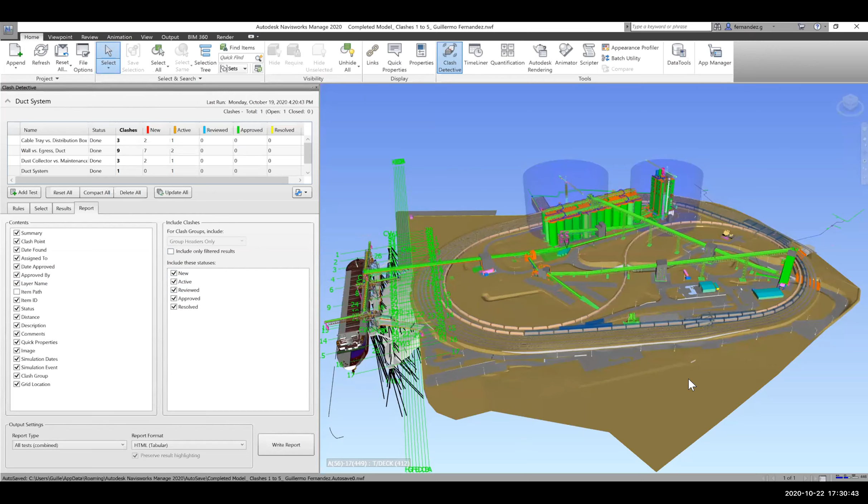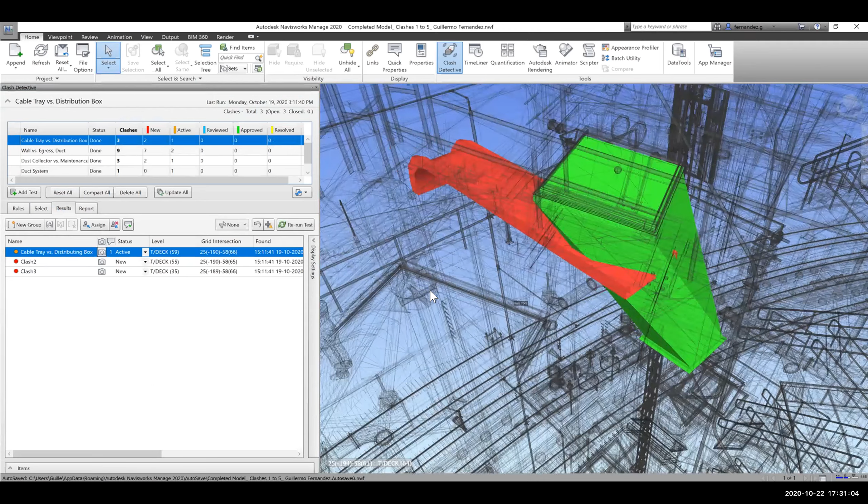So for this project, we decided to only focus on the scale tower right here. I'm going to talk about the first 5 clashes, and my partner Vladimir will talk about the next 5. For the first one, we saw that this cable tray is intersecting the distribution box, and we decided the best solution is to move the cable tray to pass right next to it so it doesn't interfere, because moving the distribution box would be much more difficult and we'd have to move the whole system.

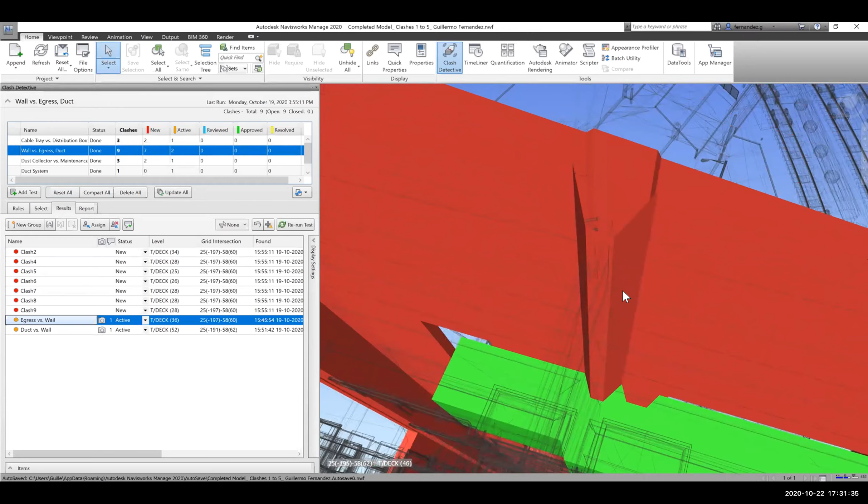The second clash we found was that this egress system, as you can see, this wall has a trapezoid shape, and the egress system has a cutout, but it does not align with the trapezoid. So we suggest making the cutout a little farther so it fits right through the trapezoid, because changing the structural elements would be super hard and costly.

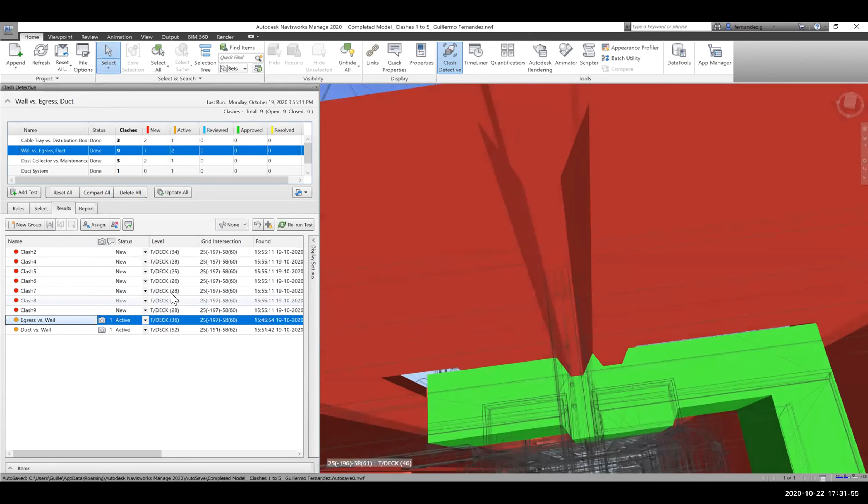The third one we found is here, where the duct system passes partly through the hole, but not completely. Some part of it passes into the actual wall, not the hole. So the best solution is to move the hole a little to the left to make sure the whole duct system falls through the hole.

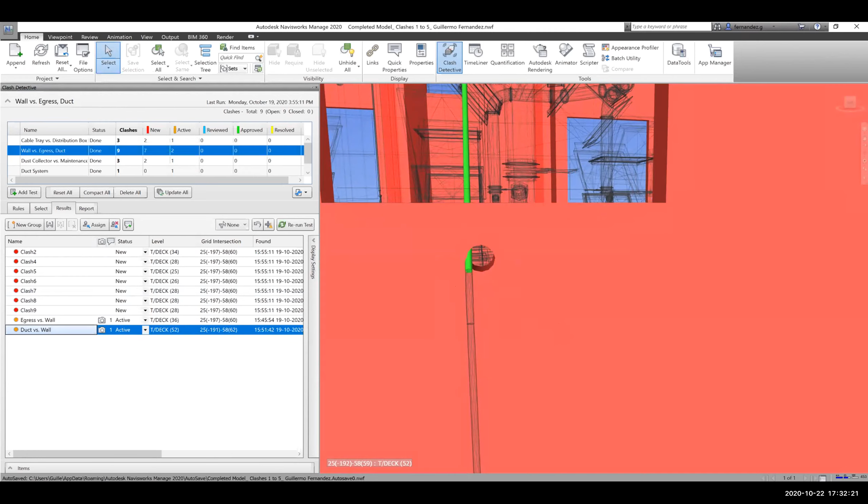Just a quick question here. Why wouldn't you move the duct instead of the hole? Because then you'd have to move the whole duct system, and that would be costly for the engineers and the owner of the project. Okay.

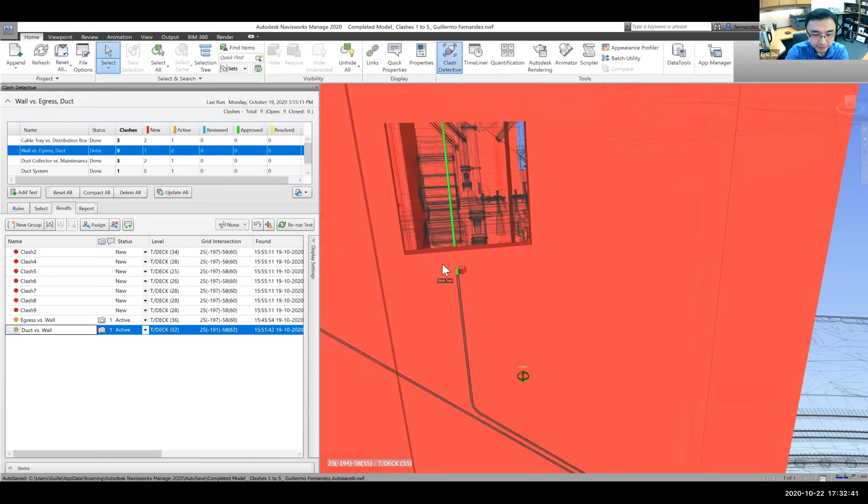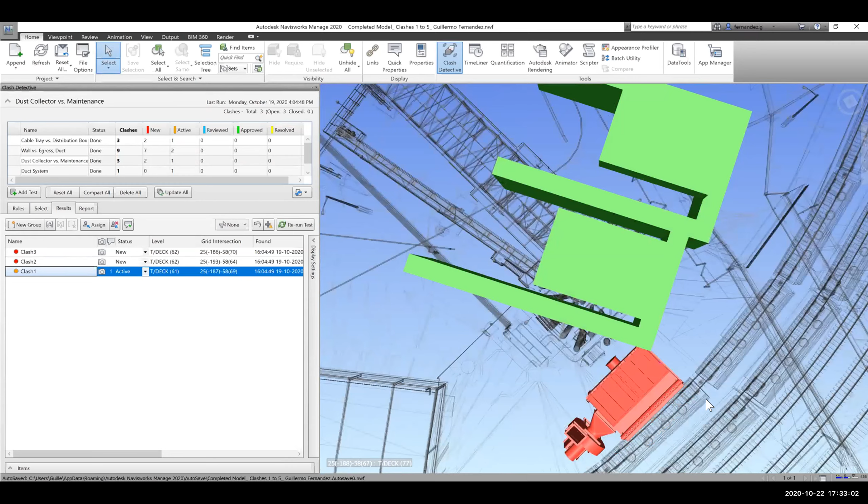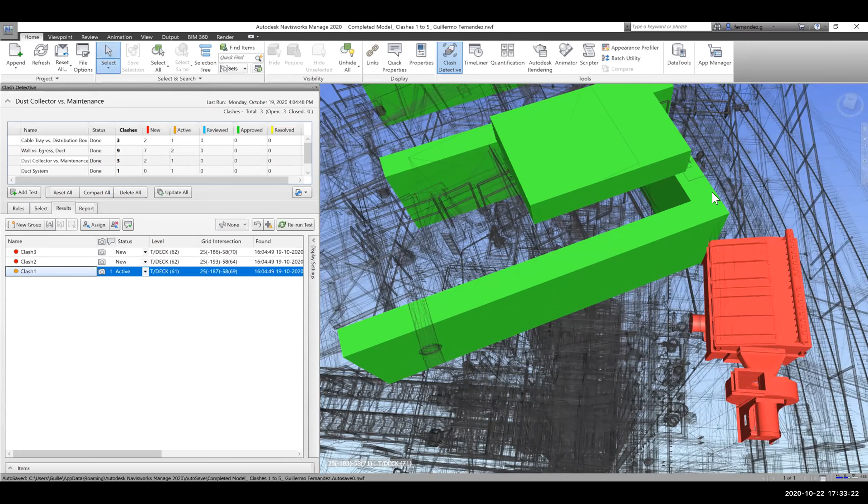For the fourth clash, we found this one. It was the dust collector, seen in green, slightly intersecting with the maintenance system in red. This one will be hard to fix because both systems depend on other things. But we think that if we make this piece turn closer to this side rather than that side, it will be better, and we can fix it like that.

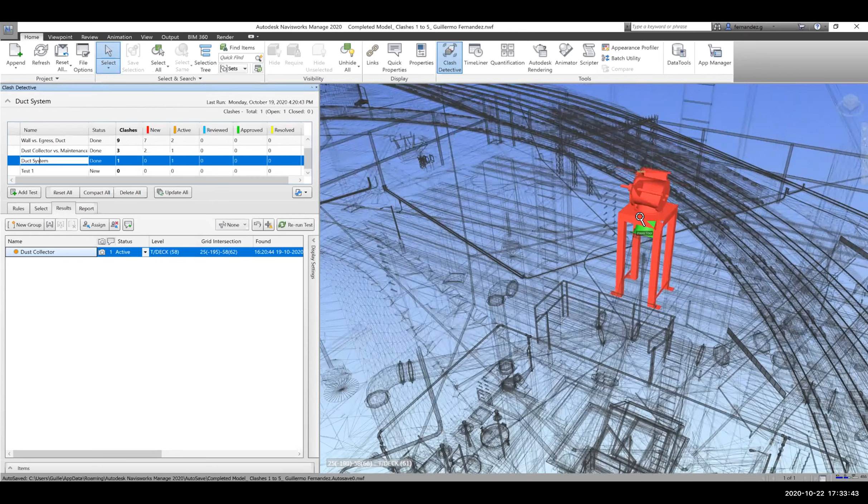The fifth one was the most intriguing one. As you can see here, the dust collector system, the red one — let me see if I can get the view, I'll just show the picture.

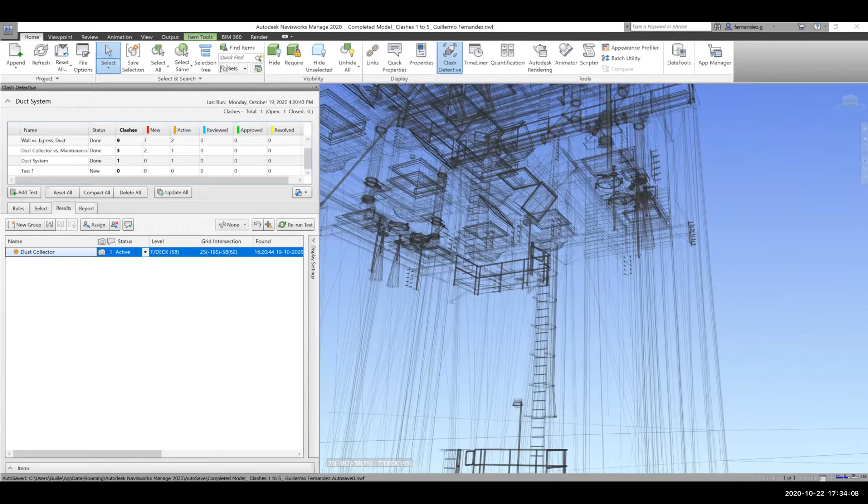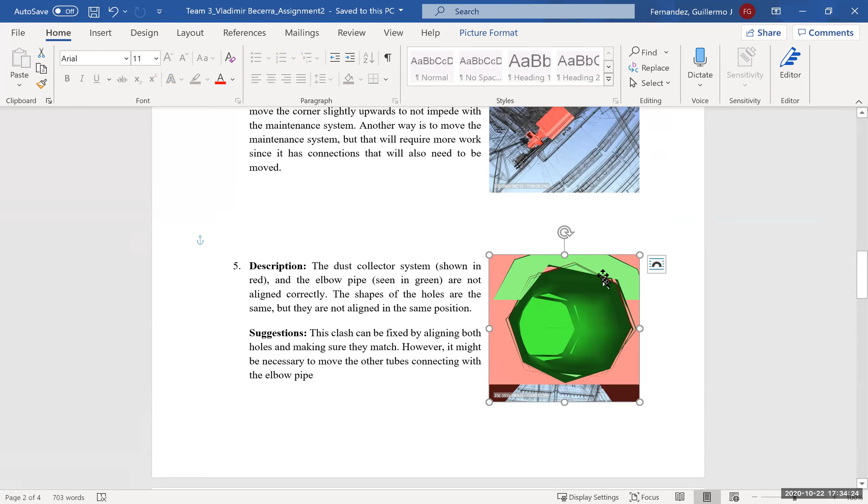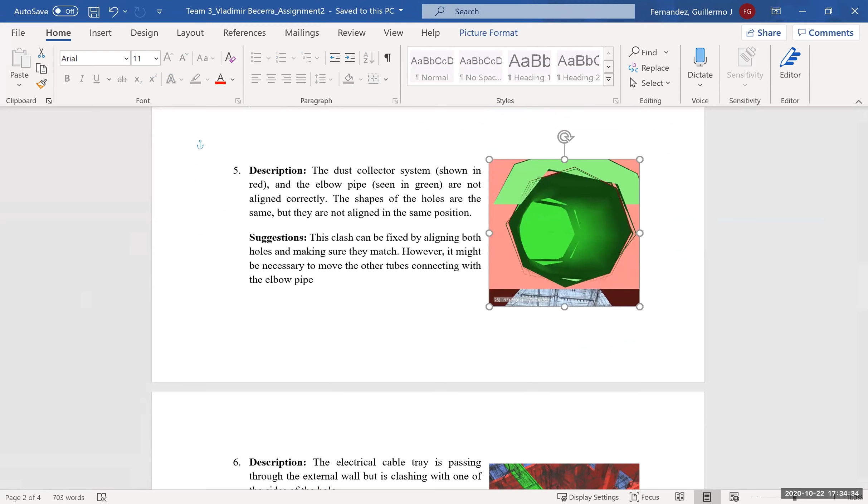Do you guys see the picture? Yes. So you can see here both the duct system and the piping going through it are not aligned correctly, the shapes aren't aligned perfectly. So we will have to move the green one slightly and rotate it a little so it fits perfectly. But the problem is that it will then intersect with the rest of the system, so we'll have to move both things and make sure they align perfectly.

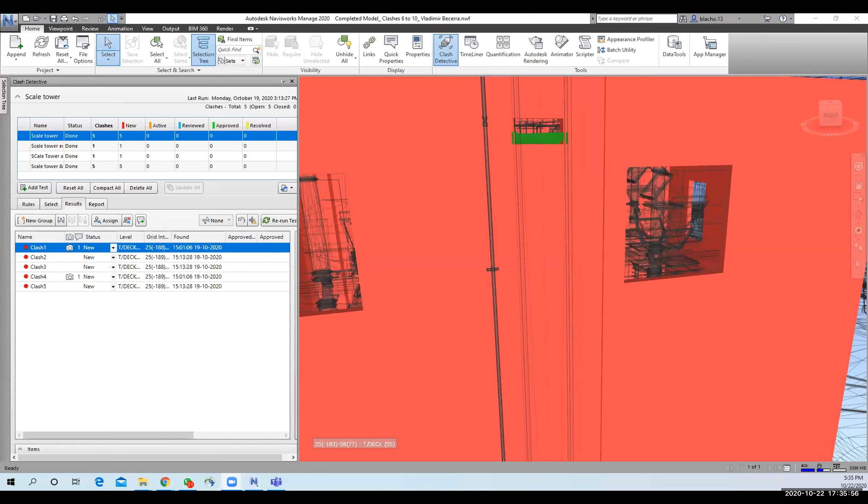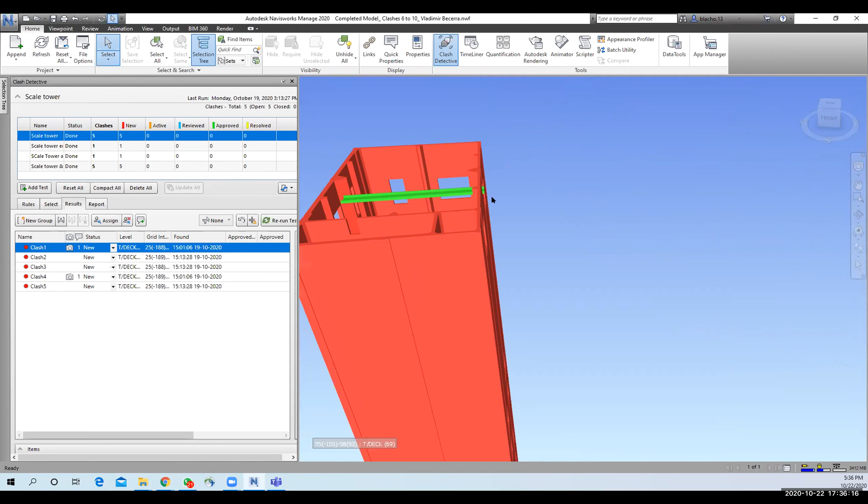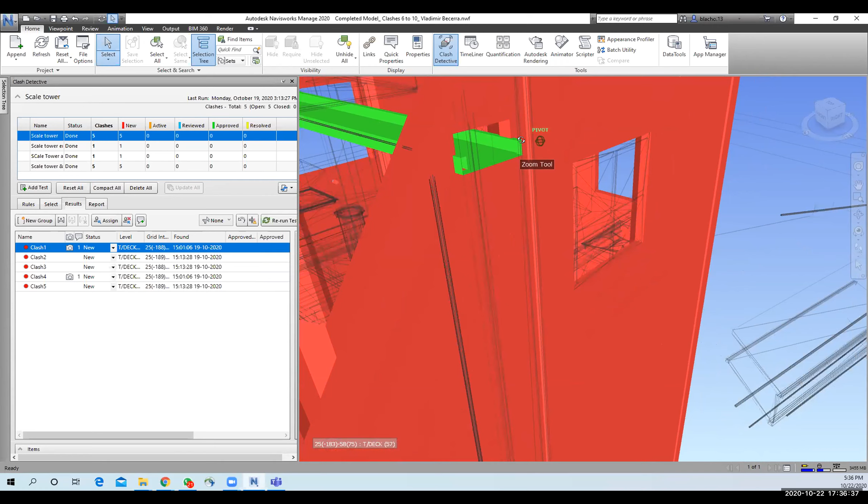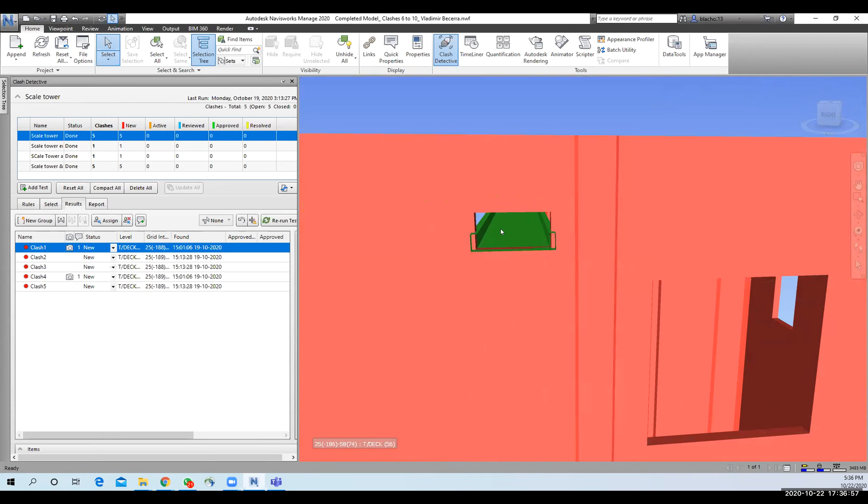So the sixth clash we found on the building, on the scale tower, is actually a clash with the electrical tray. As you can see, the electrical tray is passing through the external wall of the building. Let me see if I can show you better. So in these corners, the electrical tray is passing through the external wall. A solution that might be beneficial for this clash is changing the size of the electrical tray so it fits perfectly in the hole in the wall, or increasing the size of the hole in the wall — those are two solutions to solve this clash.

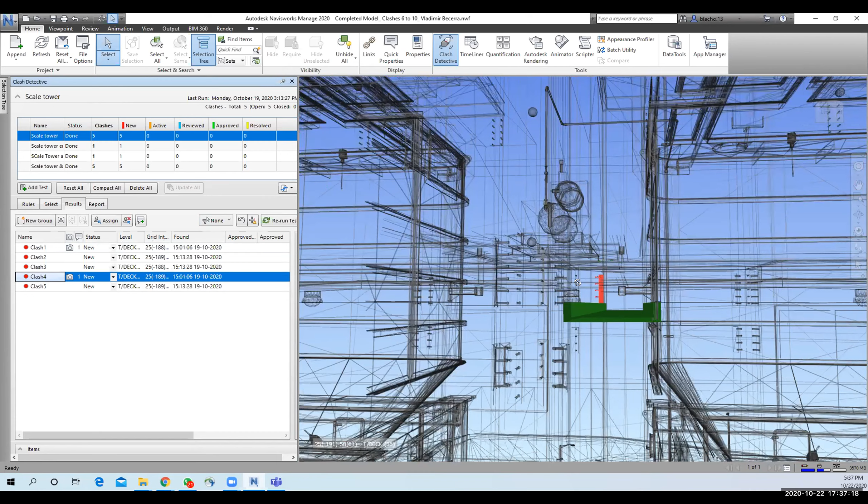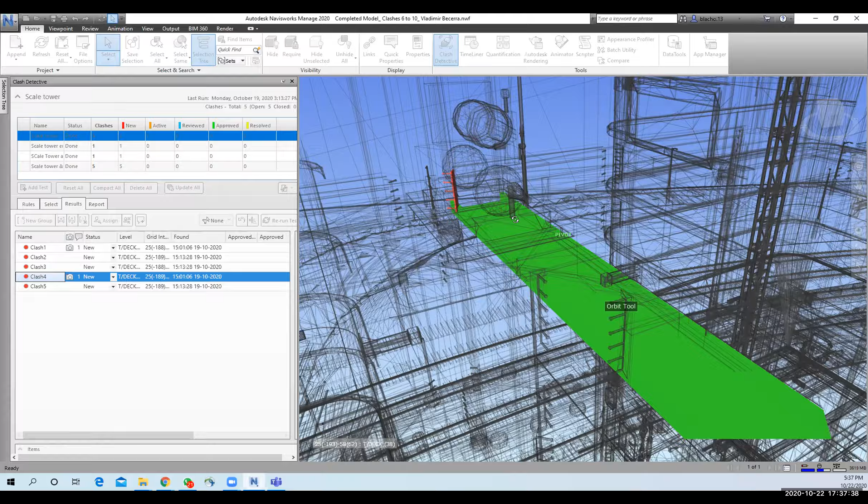The other clash that we find is — not the same problem, but the same structure — also involving the electrical tray. As you...

Maybe having some difficulties with the program. It kicked me out of the model. I'm just opening it again. I'm so sorry. It's fine, it happens all the time.

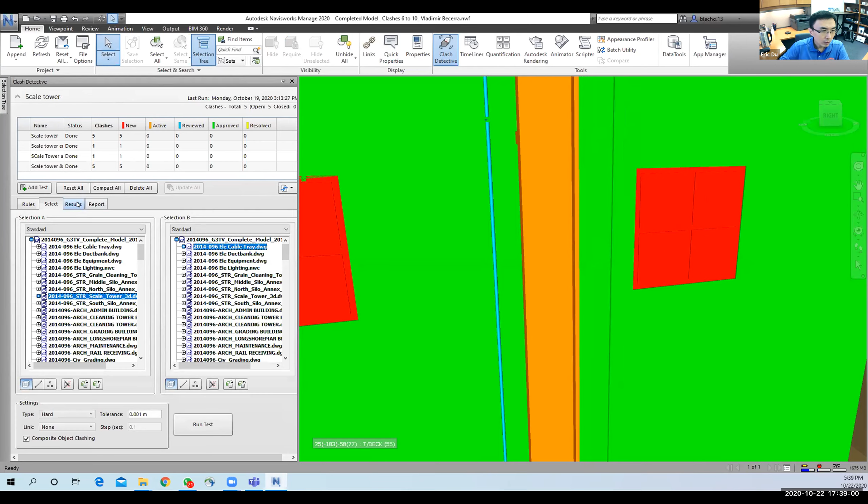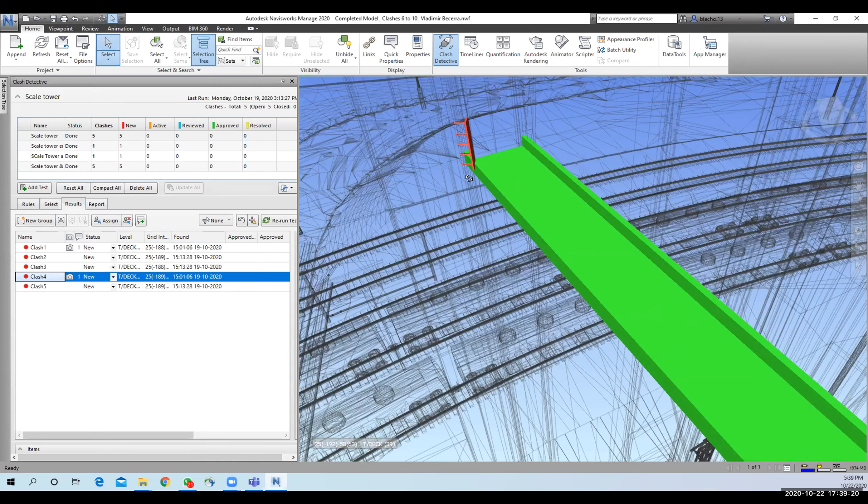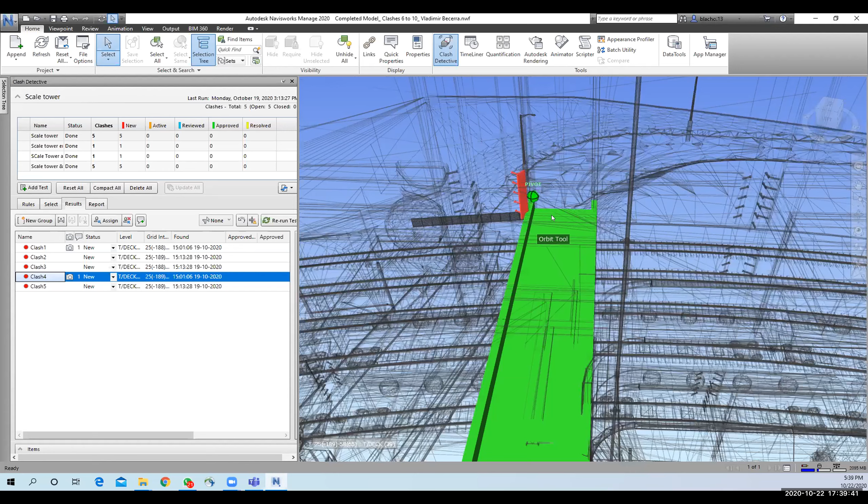The problem in this clash is that this embed plate is actually passing through the tray, the electrical tray. A solution for this is to decrease the size of the electrical tray, and if that's not possible, you just have to move the electrical tray a little to the right so that it doesn't intersect with the embed plate.

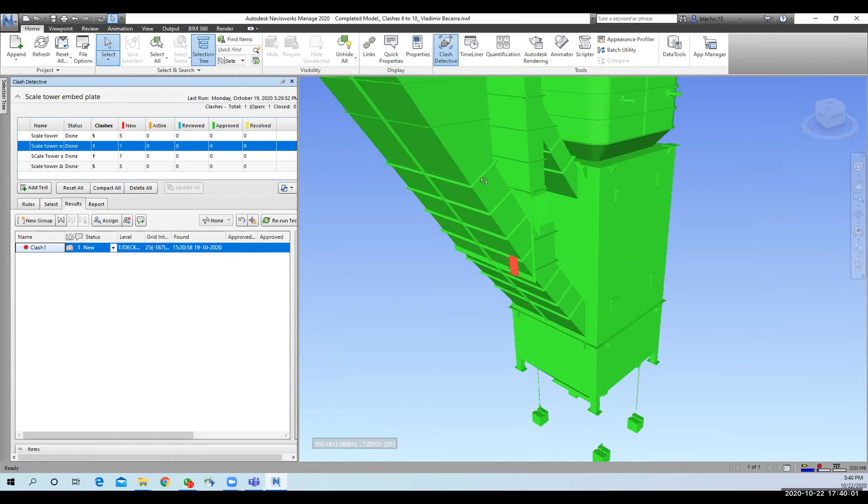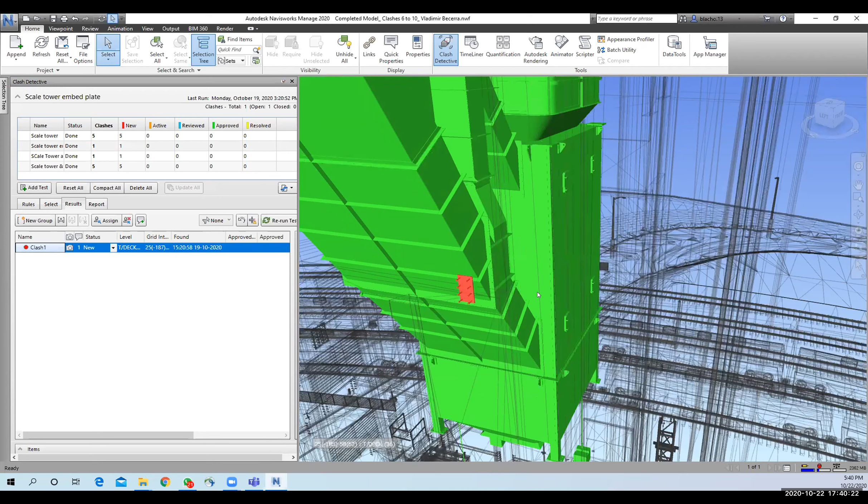So this is a clash between the mechanical system and an embed plate that I don't think is supposed to be there, because I didn't see any purpose for having an embed plate in the mechanical system. I think this is just an error in the design of the structure, because as you can see there's an embed plate already right next to that one. I think while the engineer was doing the design, they just misplaced that embed plate over there, and you just have to remove it to solve the clash.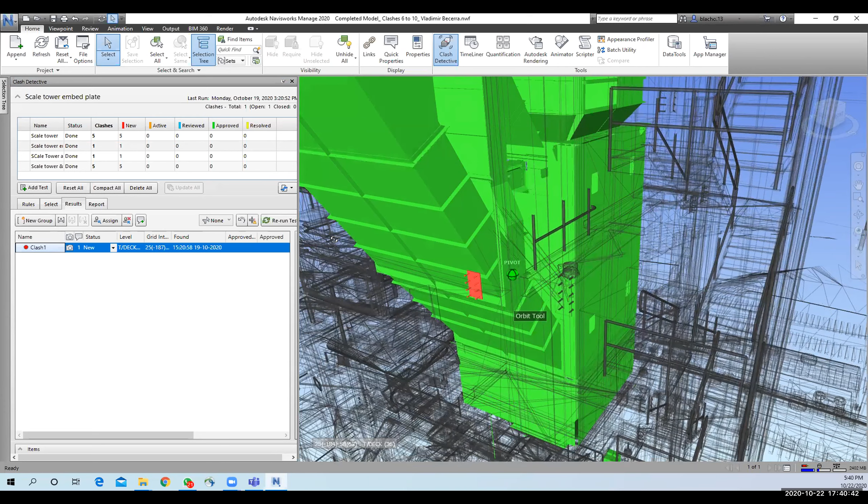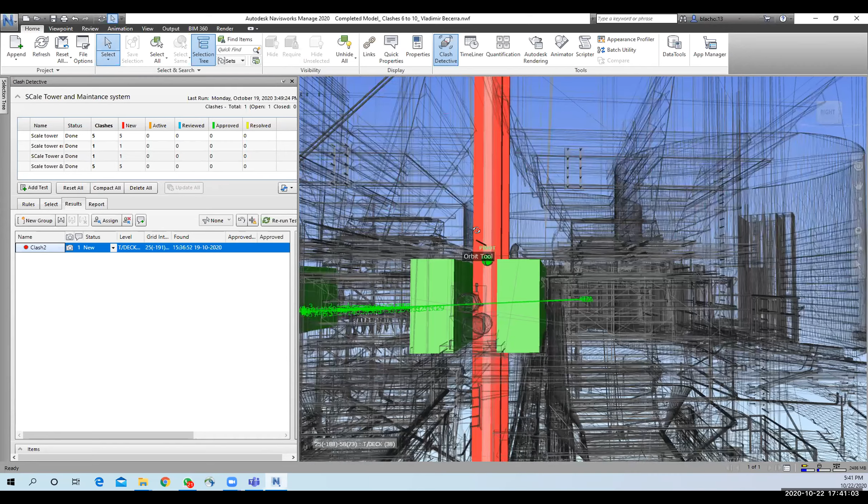Here was one of the most dangerous clashes I found in the structure, because this red column is a structural column, and it's actually crashing with a mechanical equipment, a maintenance equipment inside the tower. I don't know if you can see that. Sorry, right here - you can see the green is the maintenance equipment, and it's actually passing through a structural column. That's very dangerous because it can give instability to the structural column.

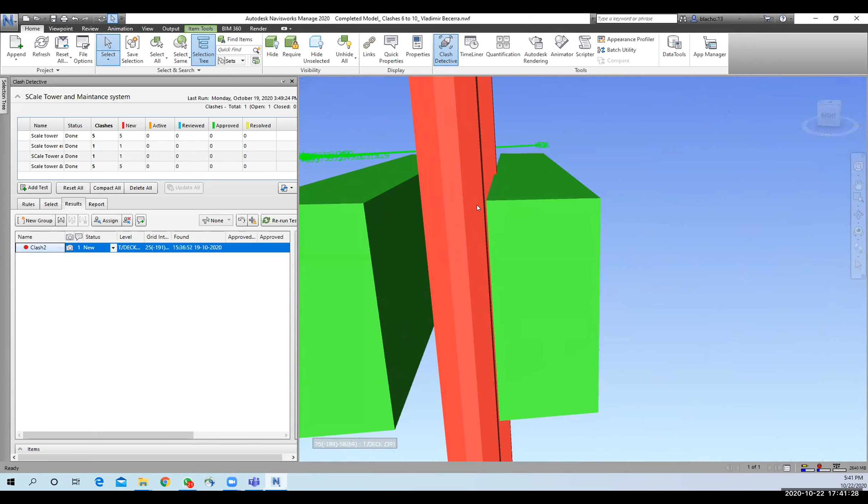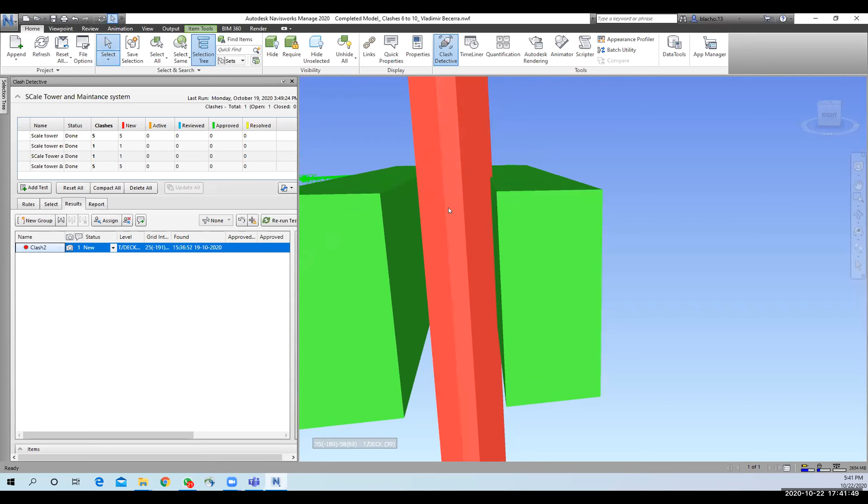So for this clash, it's just that simple to move this maintenance equipment to the right a little bit, so it doesn't crash or pass through the structural column, which is the one that gives all the support to the building.

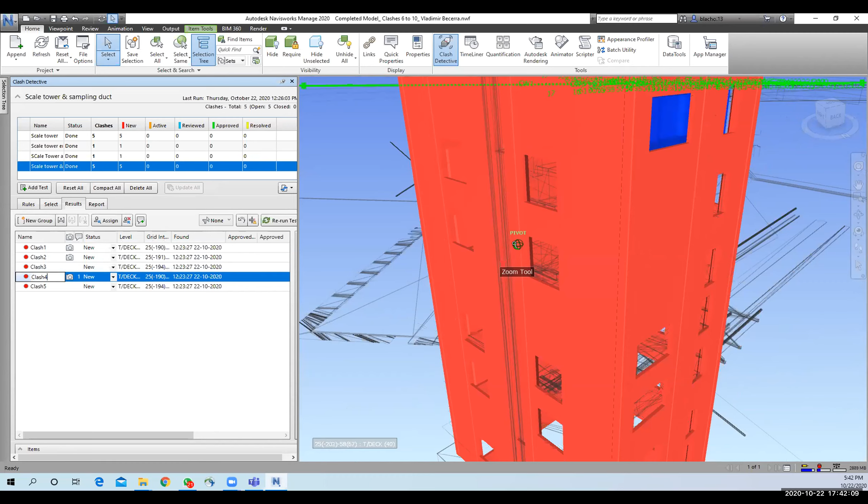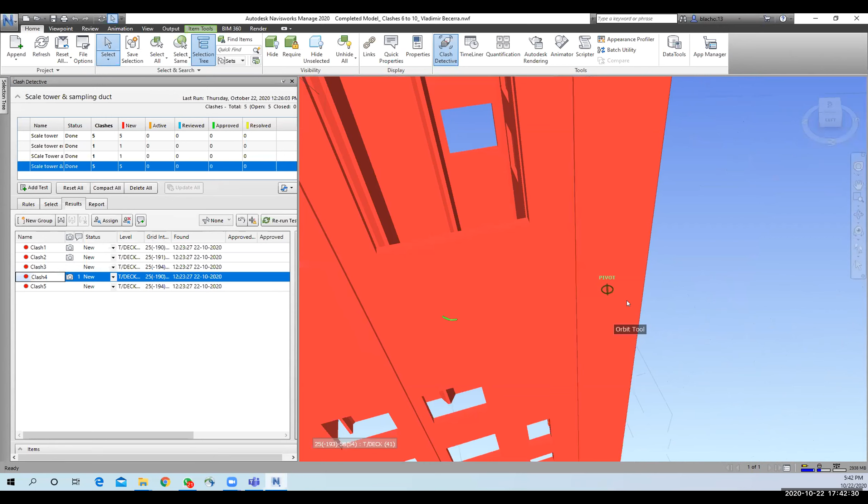So just one second. Right here is our last clash. It's just like a duct that is part of the sampling duct that goes through to this building. This duct is actually just passing through the wall, the external wall, and there's no hole in the external wall. So I think this is a problem.

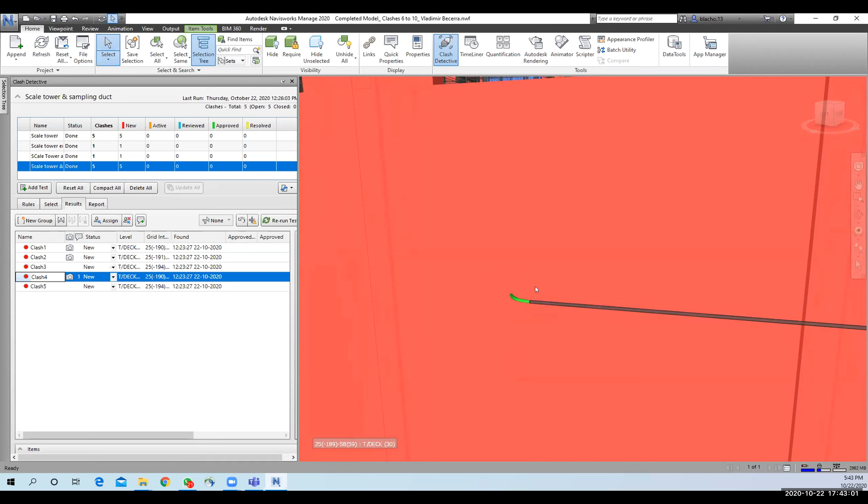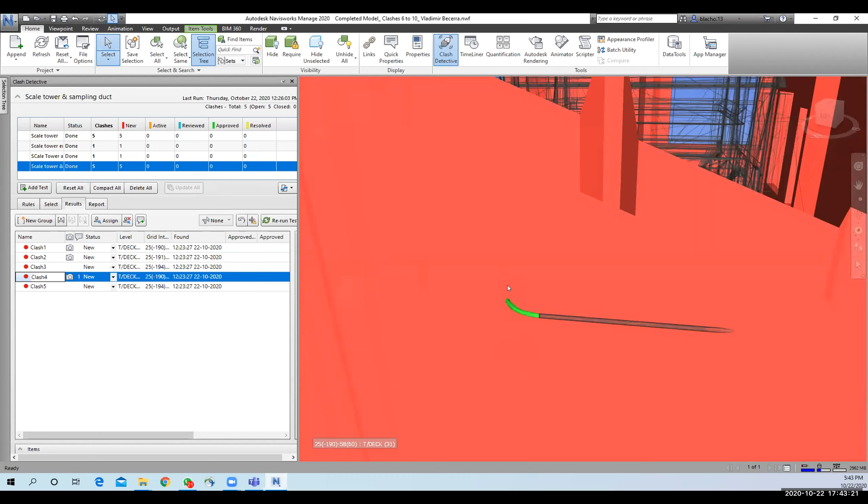Since there are different people working on the structural design, and also people working on the mechanical design of the project, there was just a human error, and they didn't communicate well to put a hole in the external wall so that the round duct can go through the wall. So a simple solution is to open a hole in the wall so that the duct can pass through the wall and doesn't crash with it.

And yeah, that's all our 10 clashes that we found in the scale tower. I don't know, guys, if you have any questions.

Thank you. So no question, but maybe a quick comment. I noticed that from what we have today, a lot of clashes are between different disciplines. The reason is a lot of designers work in silos. It's very difficult for them to have one discipline of design, such as structure, totally completed before moving to the next discipline, right? Yeah, correct.

So I guess the ultimate cure for that is cloud BIM. It's kind of like a Google Doc - if everybody can log into the same model at the same time and see the changes in real time, that probably would help them have a better sense of the spatial conflicts and reduce the number of clashes. So not a question, but maybe a quick comment.

Yeah, so they can use the BIM cloud to work together on the same project. That is an excellent tool that Autodesk has. Yep, all right, thank you guys.

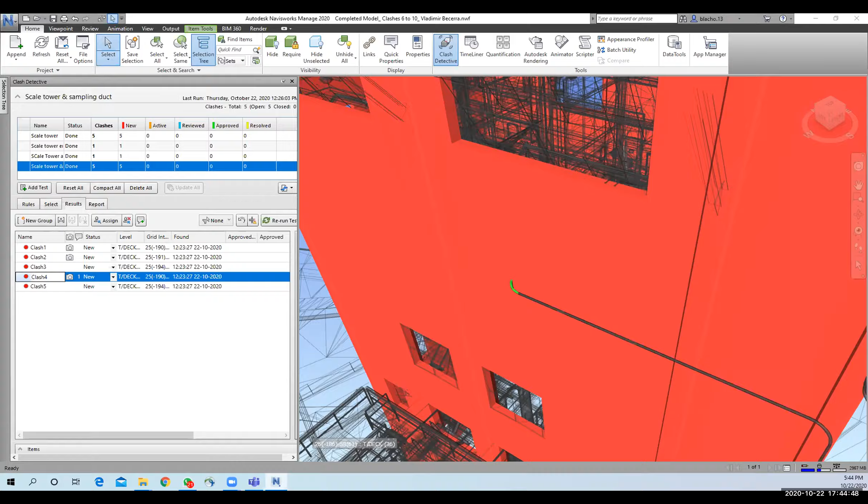Okay, all right, so here is my clash detection report from the provided Navisworks model. The tests were run with a tolerance of 0.001 meters.

As an introduction to the structural clashes, after I ran the tests, I exported them into Excel to try to find out which elements were clashing the most and prioritize those for the 10 most critical. I was just looking to see what was clashing and how often. Structural clashes I thought were more significant, as well as clashes that seemed to impair safety or operation of the facility once it was complete.

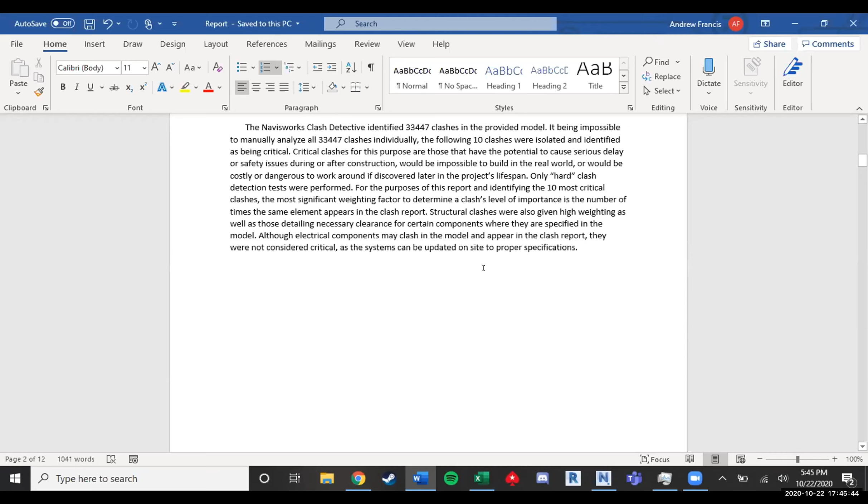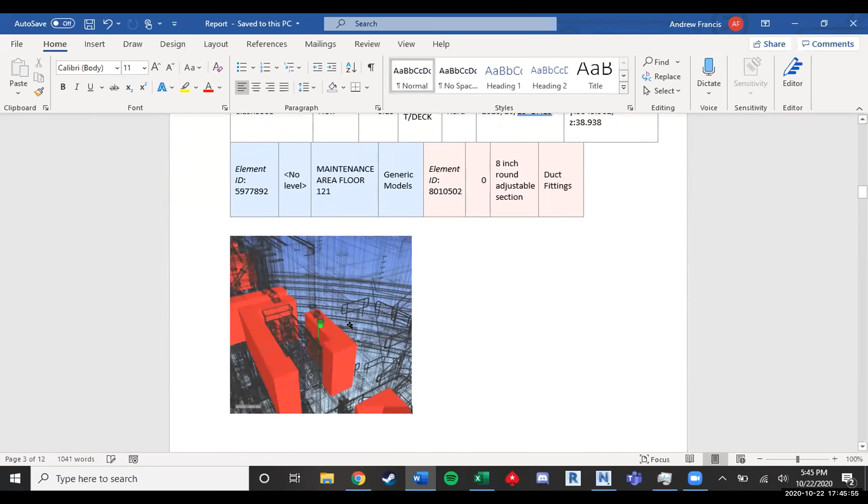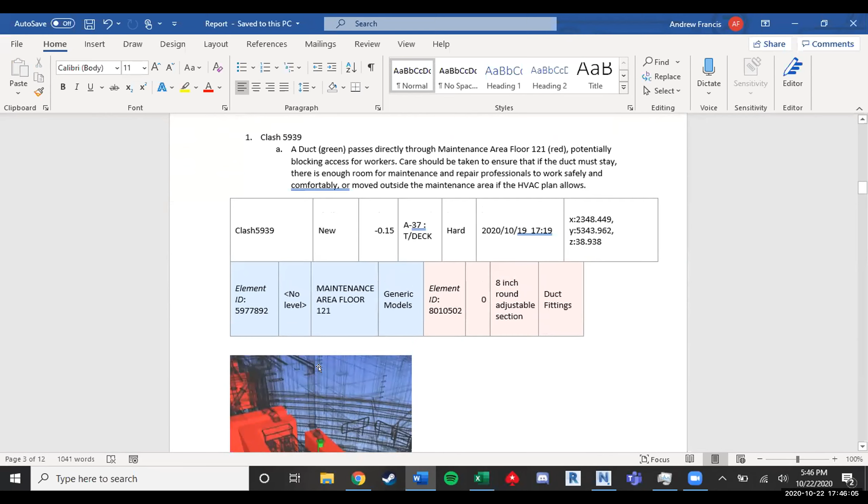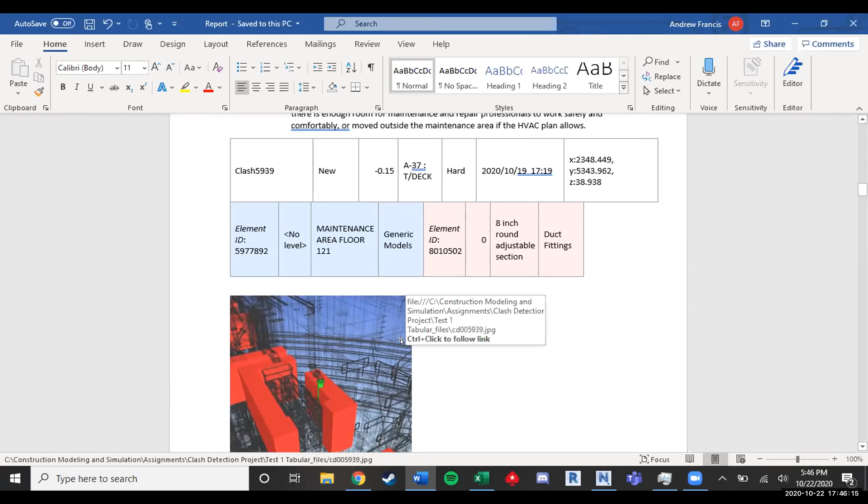So for the first clash, it was this duct here, passes through this red area, which is a maintenance area for workers to go in. I noticed that the duct went through it in a way that could prevent people from getting in there and doing what they need to. So I would suggest either moving the duct in a way that the HVAC plan allows, or relocating the maintenance area in a way that it's still possible to access.

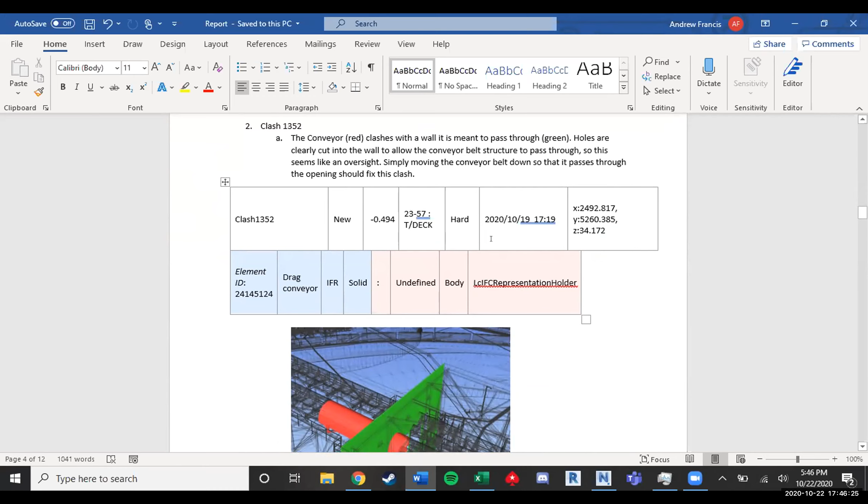And these are not in any significant order of importance. It's just kind of in the order that I noticed them.

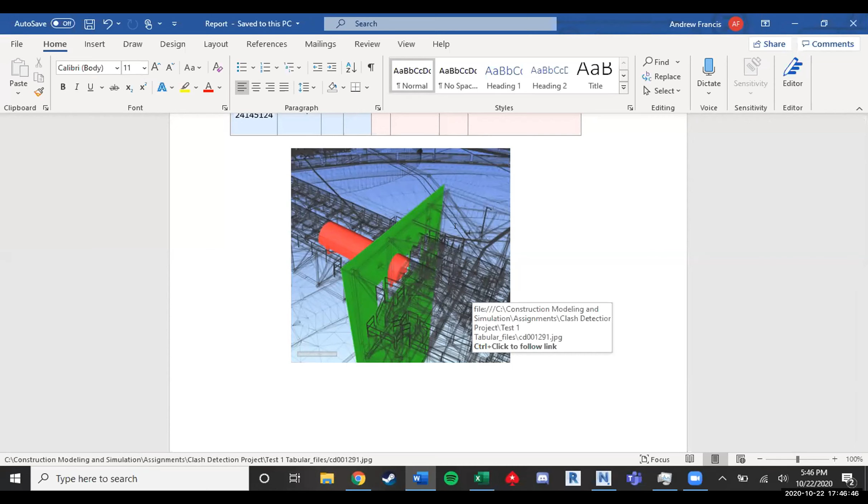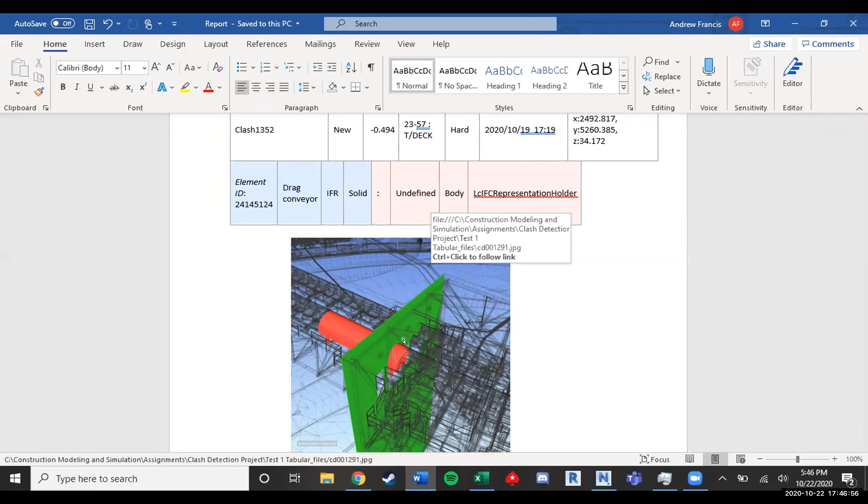In this clash here, you can see the conveyor belt, which is here on the Navisworks model, is clashing with the wall that it's supposed to go through. You can see under here that there are cutouts that it's supposed to go through that the model does not seem to follow. So my suggestion would either be to adjust that and add holes where the conveyor belt is going through, or lower the conveyor belt if possible and design allows it to.

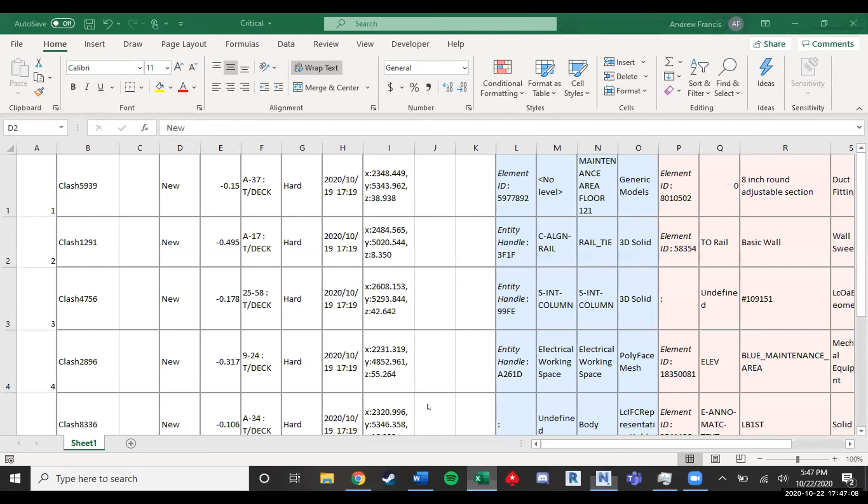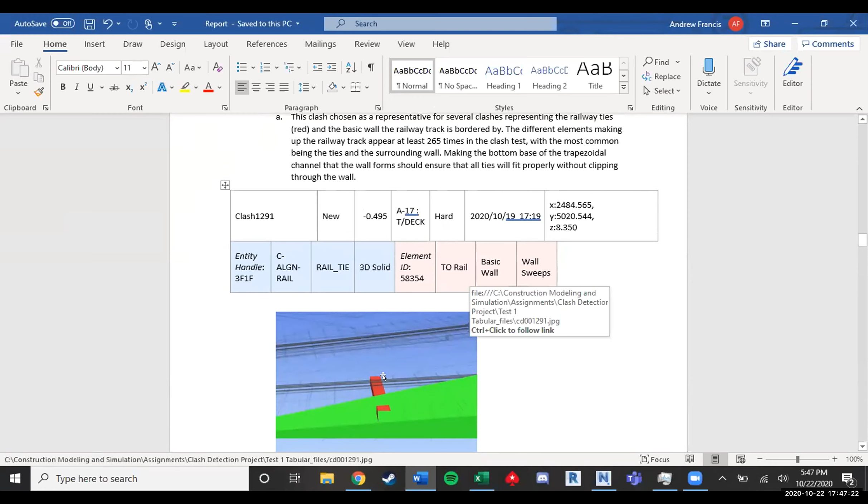This clash here was from the rail system that encircles the facility. I noticed, I believe it was about 265 times that this appeared in the clash test, that the ties for the railway were either intersecting with the local topography or with structures near the railway. So I used this as an example to say that this needs to be adjusted either landscaping wise to clear the topography around the railway more, or to just ensure that structures don't interfere with that.

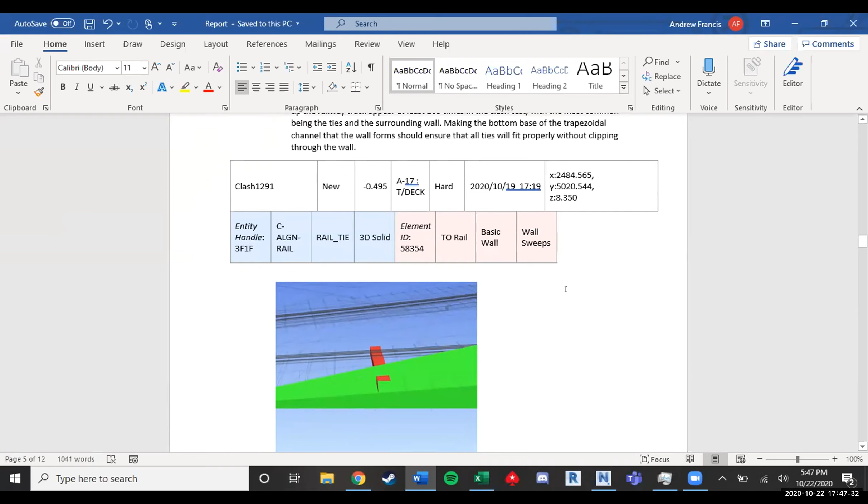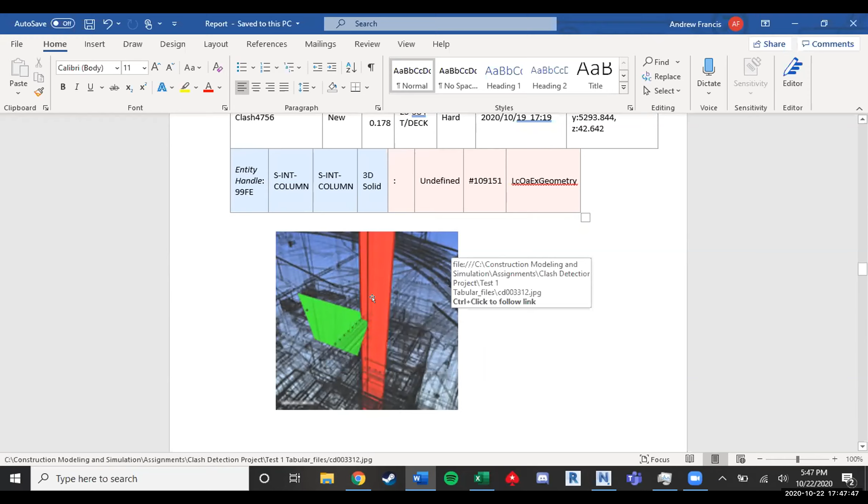Then this column that goes through the building clashed with several components. I chose this floor here as the most important. This floor just needs to be reshaped in a way that allows the column to pass through it.

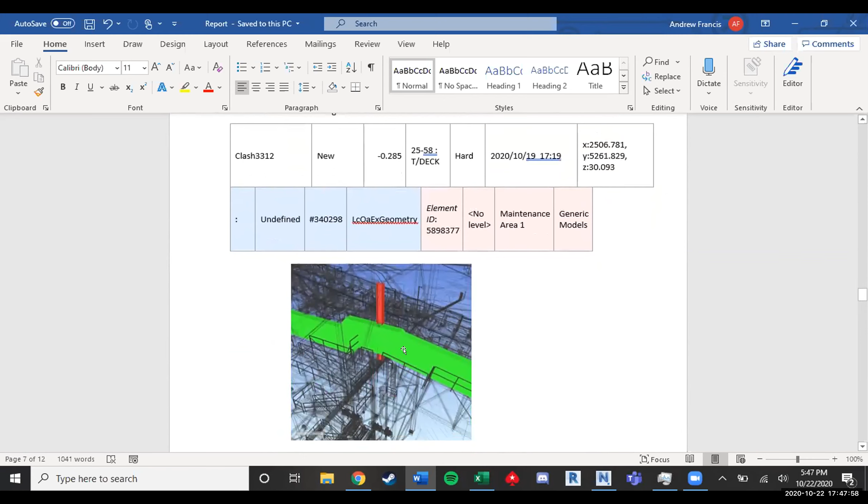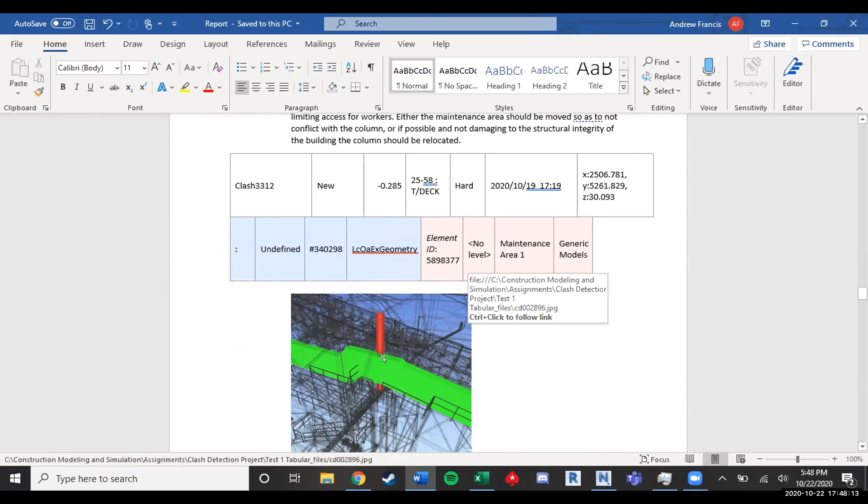This here is another maintenance area labeled in green, which has a steel beam passing through it in a way that would block workers. So if possible, I would suggest moving the steel beam as long as it doesn't damage the structural integrity of the building. Then I do believe that this beam should be relocated. And if not, then adjustments would need to be made to the maintenance area to allow access.

The sixth clash was with a designated electrical working space area and a maintenance area for mechanical equipment, which in the model completely overlap. I thought this looked strange enough that it was worth mentioning - I don't know if this is intentional and if maintenance areas are supposed to overlap for different disciplines, but it seems strange in the model. I would suggest moving these to different locations.

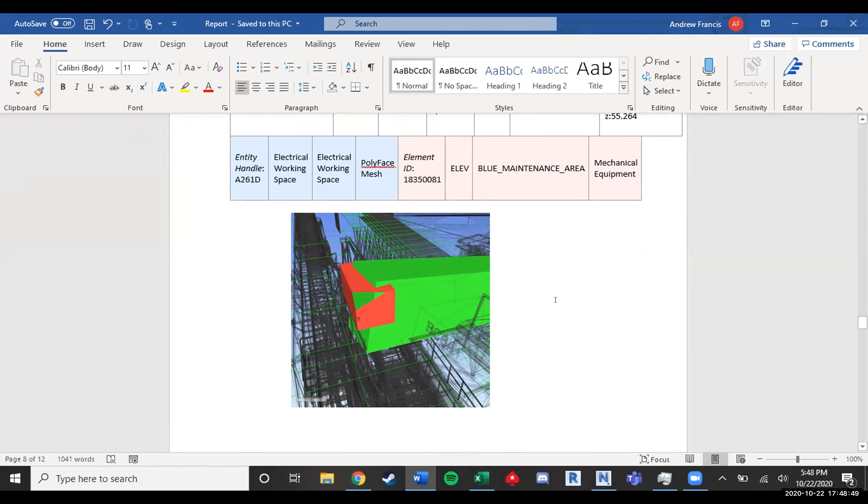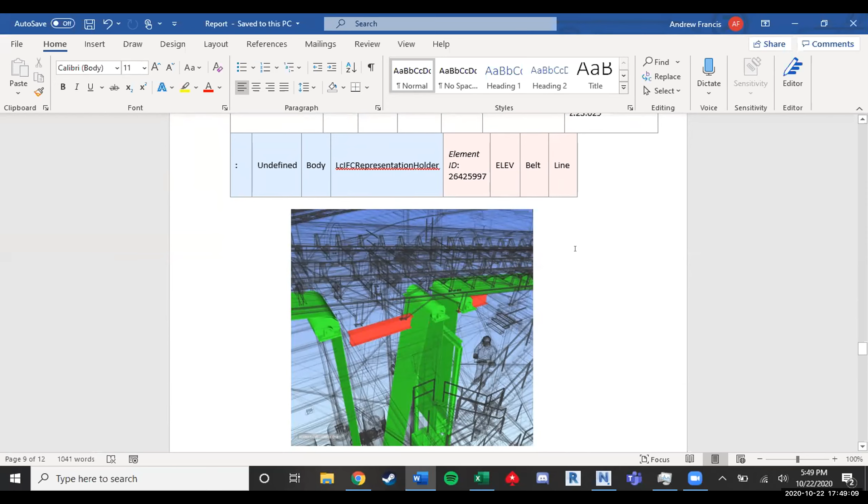Then here is another, on the conveyor belt moving up, that there's a steel beam passing directly through all of this equipment that is necessary for the operation of the conveyor belt. So this beam needs to be relocated so that it is not doing that, because that's impossible to build and the equipment needs to function in order for this facility to run properly.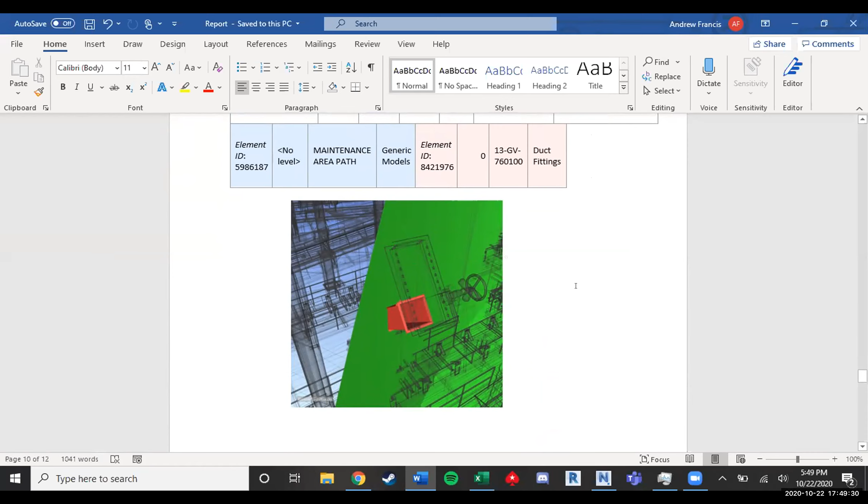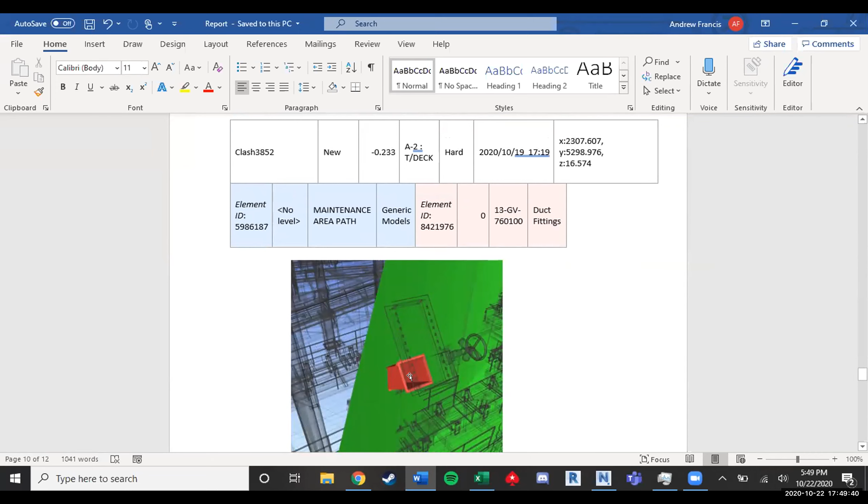This green area here is another maintenance area that has a duct passing through it. In the model, this is marked as a separate clash, that there's a valve and operations for this. But this vent just enters it in a way that blocks the path here, and I believe causes an important safety hazard that should be remedied by either pushing the vent back so that it doesn't protrude as much, or allowing the maintenance area more room.

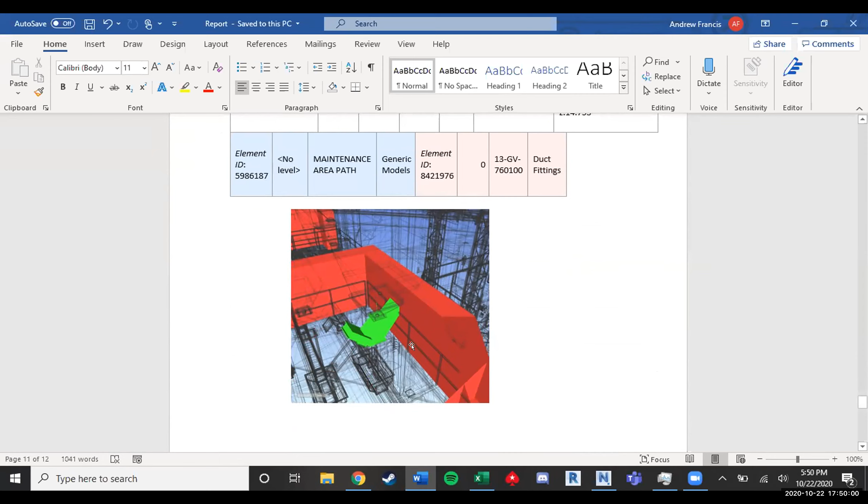This is another duct that intersects with another maintenance area, the duct here being in green and the maintenance area in red. The duct passes through at an angle that would completely block anyone from going through without ducking or crouching to get underneath. I believe that this needs to be relocated either by moving it above or below the maintenance area.

This, it's kind of hard to see in this picture, but this green pipe here sticks up through the floor in a way that could cause a trip hazard, or just general safety issues, especially so close to an open railing. I believe that that should be cut slightly to be underneath the floor so that it doesn't create any hazards.

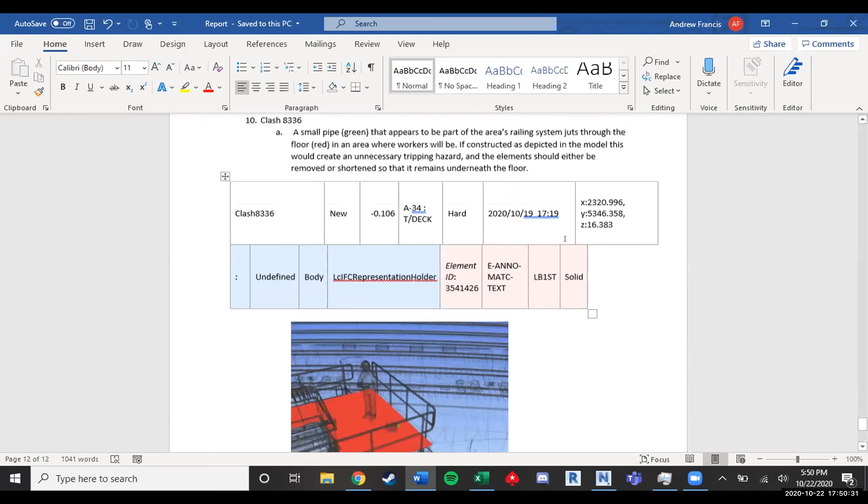And that is all 10. Thank you.

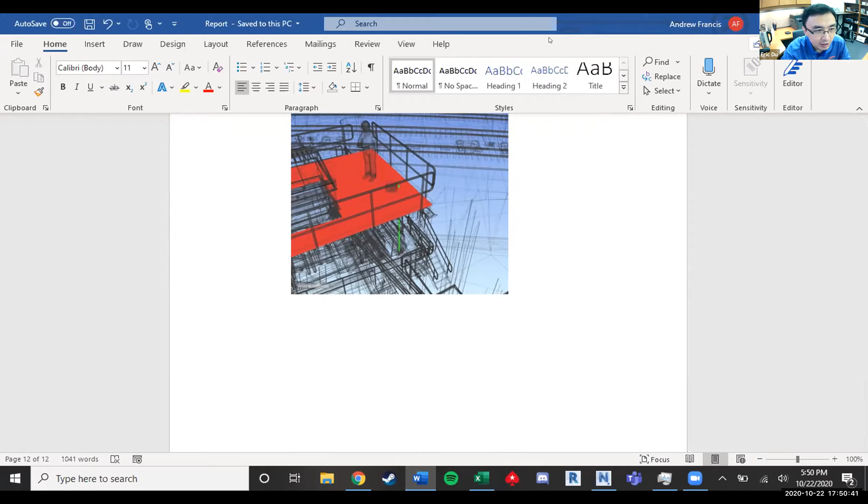Thank you, and I really appreciate you discovered some safety hazards. Usually we focus a lot on the hard clashes, but definitely enough clearance and potential safety hazards are also targets of clash detection. All right, so just to clarify, Andrew, so for this clash detection, you are on your own,

but you are moving to one of the teams, right? Yes, that's correct. I'm going to move to, I believe it was team 5. Okay. But yes. Okay, that sounds good. Yeah, I will mark it up. All right. All right, so that leaves us the last team, which is which team?

That would be me. However, I am seeming to be having some technical difficulties. I can't pull up anything on my computer. And Eric is not here today, right? No, he is not. So do you just want to push it to next week? Yeah, that's definitely work for me. I apologize, I already submitted it in the thing, so it's there, but I waited till the end, and then my computer is now not being my friend.